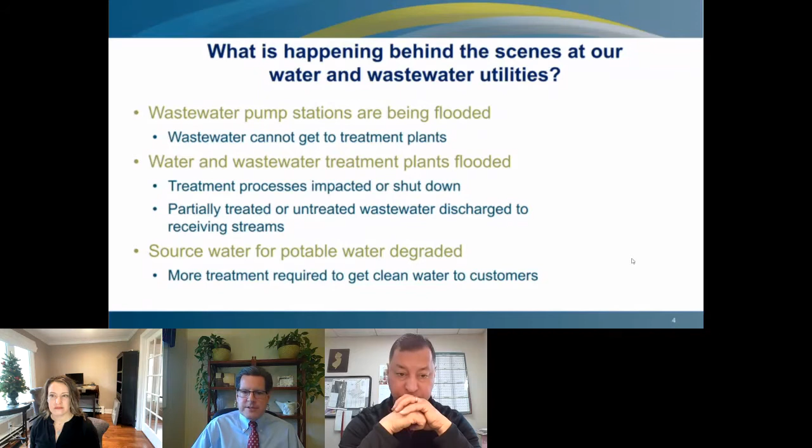So what's happening behind the scenes at our water and wastewater utilities? Well, the first thing we see, and we certainly saw a few weeks ago with the remnants of Hurricane Ida, is that the wastewater pump stations are being flooded. When those pump stations are flooded, we can't get the wastewater to the treatment plants to be treated. Then downstream from those pump stations, we're getting water and wastewater treatment plants flooded themselves. When the flooding occurs at those locations, treatment processes get impacted and sometimes get shut down. We end up with partially treated or completely untreated wastewater discharged to receiving streams. We also have source water issues, because if the wastewater treatment plants are discharging poorly treated wastewater, you end up contaminating the receiving streams, the rivers that we're pulling our drinking water out of. And so the potable water treatment facilities have to treat to a greater level to provide clean water to their customers. Go ahead to the next slide.

Here's a picture, and you can't appreciate this because you don't know what these tanks look like, but the circles you see there - this is the Somerset Raritan Valley Sewerage Authority on September 2nd. There are 10-foot tall tanks there that are totally underwater. Those round rings you see are the tops of the tanks, so there's more than 10 feet of water there. These are the highest flood elevations ever recorded at this facility. This facility's been flooded out in the past, but never to this level, like what they saw with Hurricane Ida. This is a very substantial treatment plant - 23 million gallons a day on average is treated, and during this time it was more like 70 million gallons per day being treated. So their effluent, the treatment plant, was obviously severely impacted.

Effluent quality was reduced. There's a tremendous risk to the operators of these facilities when this happens. I had one guy telling me he was standing in ponded water and suddenly felt an electrical charge going through his entire body, because some of the pump motors were submerged and it was electrifying the water. In this case, there were hundreds of thousands of dollars in damage to the facility.

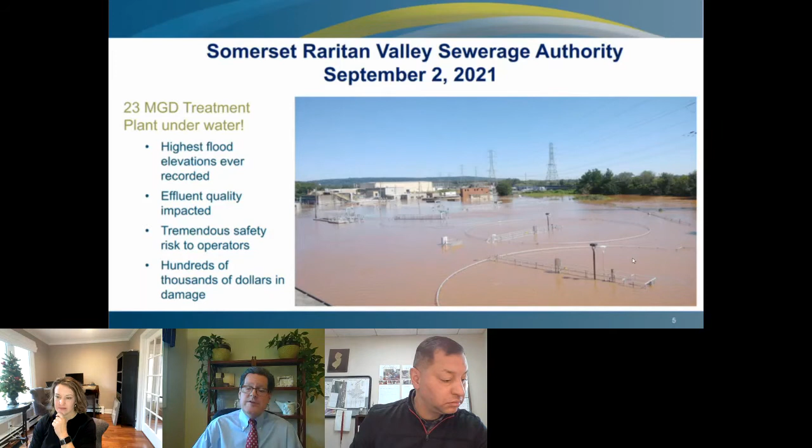If you go to the next slide - this is the Stony Brook Regional Sewerage Authority. I've tried to give you examples of all different size treatment plants. This is their Pennington wastewater treatment plant, only a 500,000 gallons per day treatment plant, but this plant also was flooded to historic levels. In fact, this plant had rarely seen flooding in the past, and it got wiped out by the remnants of Hurricane Ida. You can see here, this is actually when the water level dropped in this picture.

The water was being pumped out. This is a second floor pump station, so there was certainly more than 10 feet of water ponded. Not only did the pump motors get ruined, but you can see there's a chemical feed storage tank laying on its side. They had things like that happen where storage tanks were toppled as a result of the floodwaters. Here again, effluent quality was impacted because so much damage occurred to the treatment plant.

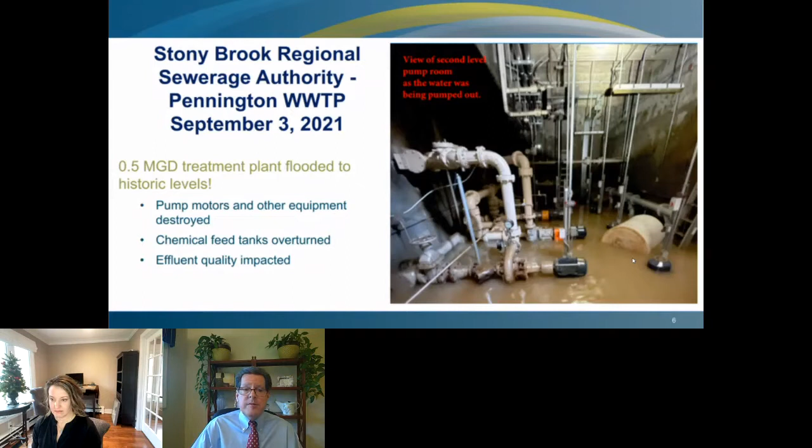We have designed, on behalf of Montgomery Township, a flood wall as a resiliency project to keep this treatment plant from being flooded. But unfortunately, it took 19 months for us to get land use permits out of New Jersey DEP so that we could construct that flood wall. So we could have had this facility protected from this storm, but because the permitting took so long, we haven't been able to build that flood wall.

So something I think we need to think about and discuss today is a way for regulatory agencies and the regulated community to work together better to fast track some of these resiliency projects.

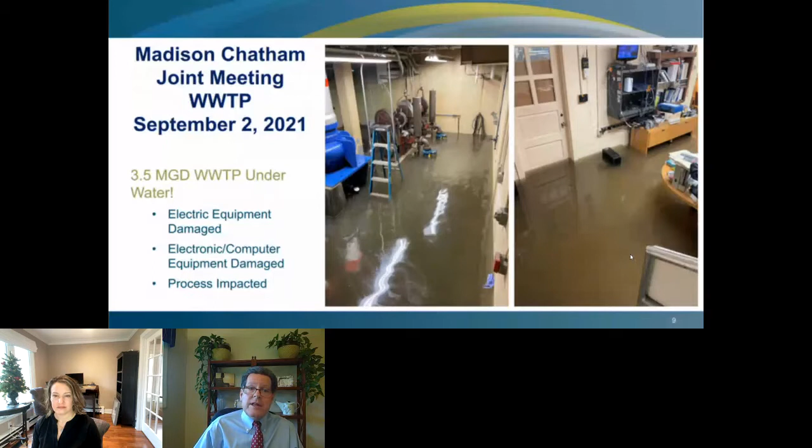Here's the same treatment plant. As I say in the caption here, this isn't snow. This is foam as a result of the treatment process being upset.

Crazy things happen when treatment plants get impacted from flooding. The biology gets impacted, and when that happens, things like this happen. Unfortunately, it sometimes takes weeks to get a biological system back in operation. So anything we can do to avoid this happening in the first place saves an incredible effort down the road.

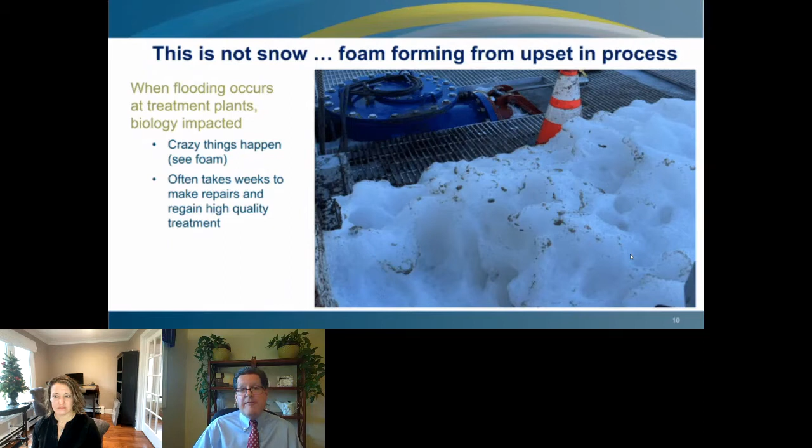So just some thoughts for the future. Given the climate changes that we're experiencing and the substantially increased flooding we're seeing in New Jersey, first of all, we need to update our tools to predict flooding elevations better. What we saw in Hurricane Ida in some cases were flooding elevations greater than the 500-year storm. So we definitely need to predict that well.

We need to incorporate resiliency planning into new designs and our existing facilities. Sometimes after facilities are built, people think that's just the way it has to be. We can incorporate resiliency into our existing facilities.

We need to improve collaboration between the utilities and the regulators like DEP to fast track permits for resiliency projects. A permit for a flood wall should not take as long as a permit to build a 1,000-unit subdivision. They have to be treated differently.

And some resiliency planning is better than none. Sometimes people think it's going to cost millions and millions of dollars to protect from what happened in Hurricane Ida. That's true, but it may be that for 100 times less, you could protect from the 25-year storm, and that's worthwhile. So you need to start somewhere. Look at what low-hanging fruit you have to protect, and that may be for less expense.

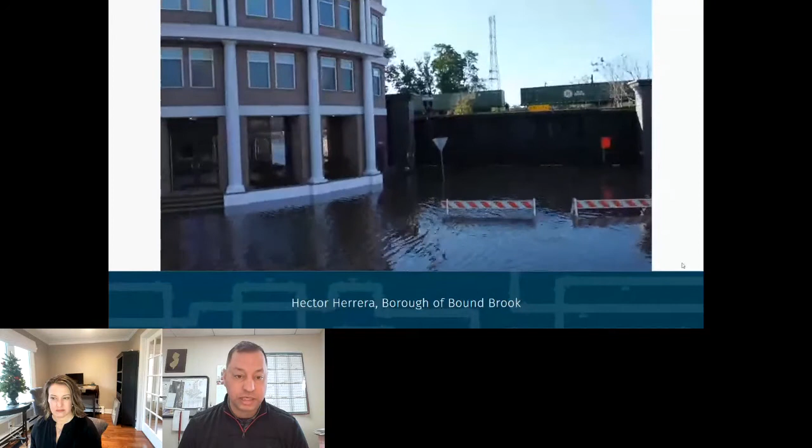Namely the Jersey Transit train getting stuck. And what I really wanted to talk about today was the failure of the Greenbrook pump station, which is owned by the Middlesex County Utilities Authority, a little bit down, not quite a mile down on the Raritan River.

So what you're seeing now is an area that is right at Main Street going into South Main Street. That's the Meridia building, high density. And all of that water that you see there is actually from the backup from that pumping station.

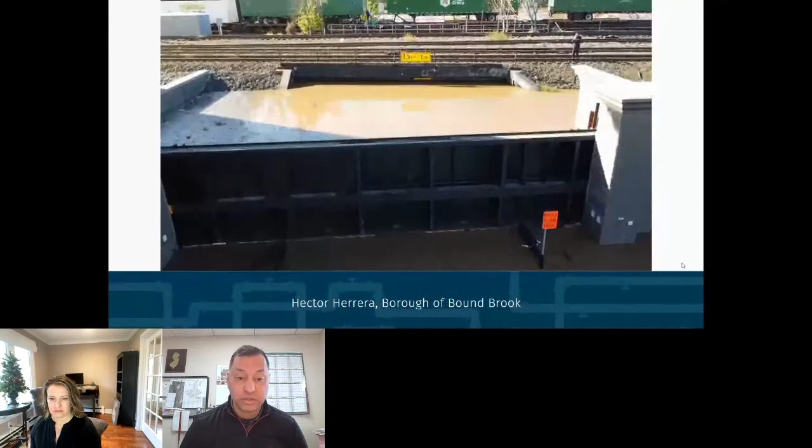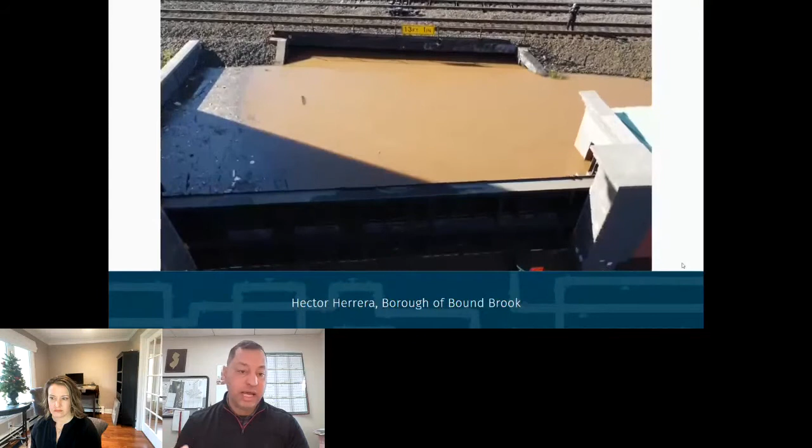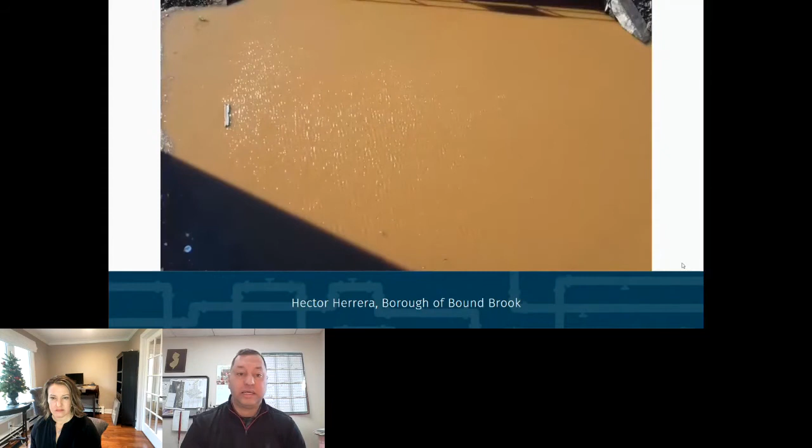That area and that pumping station actually takes on two different systems. One, we'll see in a bit, comes from the borough itself and goes eventually to the Middlesex County Utilities Authority, the MCUA plant. But also very close to here, there is a Plainfield Area Regional Sewerage Authority, PARSA. There's also a 60-inch main that goes through the borough in one of our parks, and I'll show you that in a moment.

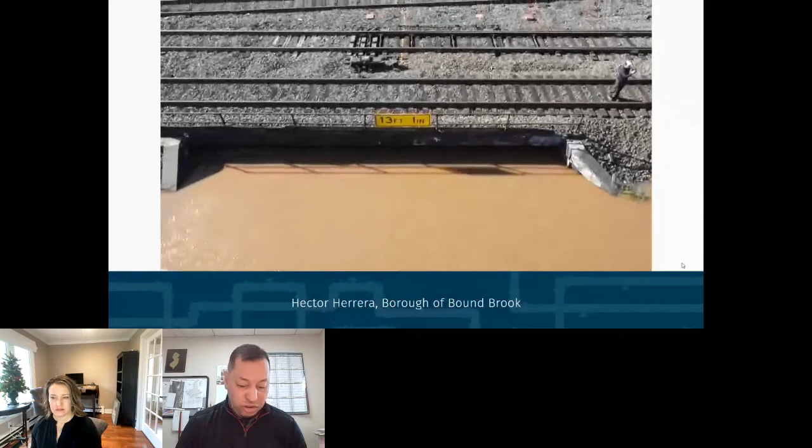So backing up a little, this was going to be the first big major storm since the completion of the flood control project. On our end we're like, this is it, this is the test, this is what millions upon millions of dollars and almost 50 years of planning had come to. It was this moment. And really, we were so focused on that, the communication both ways with the MCUA didn't happen.

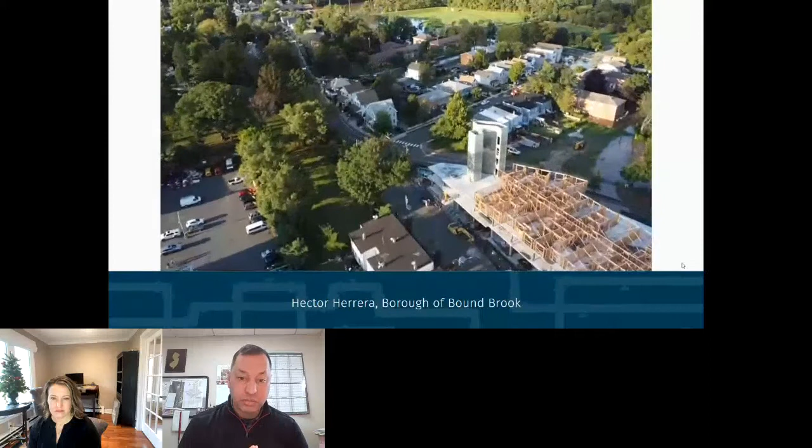So in the middle of that night, right in that area, somewhere a little after 4 in the morning, it starts to back up, and that smell — we all know that smell. This isn't from the river, this isn't the gates failing, this is sewage. We evacuated the area, and what have you.

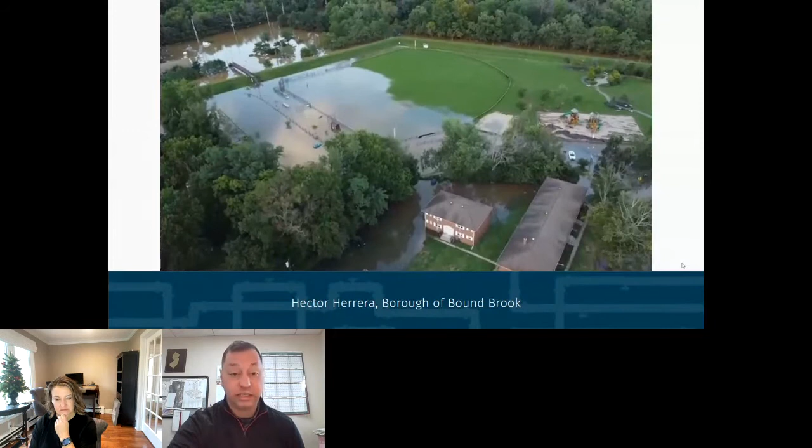The next day, that's the park I'm showing you — you can't quite see because this is after — but after daylight it basically looked like a geyser there. So like, what in the world is going on here? Again, our focus was so much on the gates, we hadn't even really thought about this.

Only to confirm later with the MCUA that yes, they had to abandon that pump station because it was underwater. Again, it's right on the banks of the Raritan, and that was the issue. Eventually PARSA came and cleaned up the park. The MCUA has stated they're going to invest a lot of funds into improving that pump station in hopes of something like this not happening. But really, what I wanted to focus on as the borough administrator here in Bound Brook was the communication aspect of it.

In the days immediately following, we got on the phone with both entities, PARSA and the MCUA, and we agreed there was a need for improved communication. In the days after, they identified and shared with us some of the improvements they would be making, and of course PARSA, every step of the way of cleaning the pump station and the park area, was in contact with us. It's really important for me, and for everyone, to have that open line of communication with our partners.

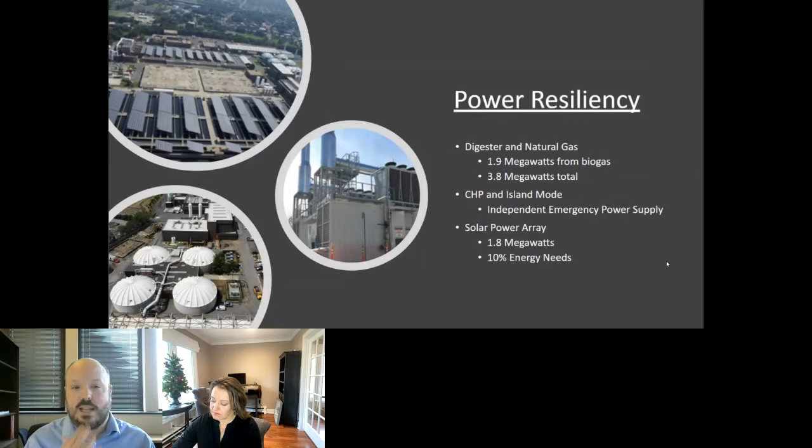I'll only touch on this briefly, but we've also taken steps to increase our wet weather capacity to 185 million gallons per day. Kudos to our operations and maintenance staff who operated a wastewater treatment plant while doing all of these projects, it was really something to see. At the same time we were completing the digester and the combined heat and power system, we were also expanding the capacity by 35 million gallons per day, which means that in times of increased precipitation, we can take more combined sewage from the CSO communities.

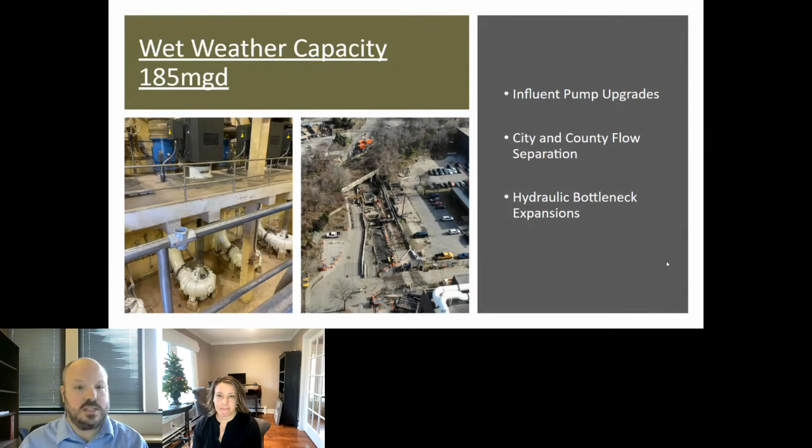Next slide, please. So now I'll talk a little bit about precipitation and flooding. While, as I've just talked about, we've taken strides to take more flow into the plant, we can't convey and treat everything from the Camden combined sewer system, which means we have to really start planning and designing projects in Camden to reduce flooding and overflow.

We have 3 projects in design for Camden City aimed at handling increased precipitation events which caused this flooding, I'm just going to highlight one now: the Pennsauken disconnect. There's a historical, and for the regulators out there, very permitted interconnection between Pennsauken Township and Camden City, which significantly contributes to flooding and overflows in the Cramer Hill neighborhood of Camden. The design is to eliminate the interconnection, separate the area of Pennsauken that is contributing these flows into Camden, get the sanitary flow to the wastewater treatment plant, and the stormwater conveyed to the Delaware River via a stormwater pumping station.

And the climate change piece is this: for today's needs, the stormwater pumping station needs to push out about 60 million gallons per day. However, with models and experts predicting up to a 25% increase in precipitation, the CCMUA is sizing the pump station and the force main to be able to handle up to 120 million gallons per day of stormwater. The idea is to build the infrastructure now for an increased need that we know is coming. So the building will have a larger wet well than is needed for today's conditions, a larger force main, and room to add more pumps and emergency generators. So as the need to push more flow arises, we will not need to go through a major construction project to accommodate it. Next slide, please.

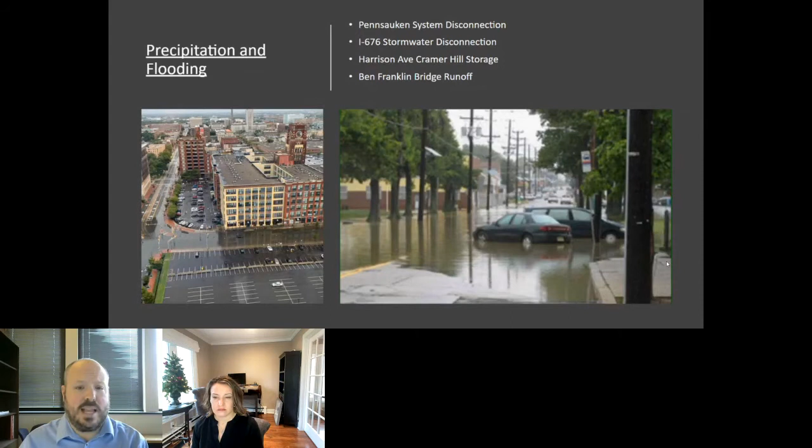I'll run through this briefly, but the last thing that we're doing, really at a planning level, is working with Drexel University and putting together a comprehensive model for Camden City, which will allow the authority to focus on where river rise, predicted to be as much as 35 inches in the Delaware River by mid-century, and increased precipitation and flooding will impact vulnerable populations. By trying to understand the future conditions now with the model, we'll be able to better locate and plan anti-flooding projects in the city during our long-term control plan implementation.

So these are a few ways that the authority is working forward to try to counteract climate change.

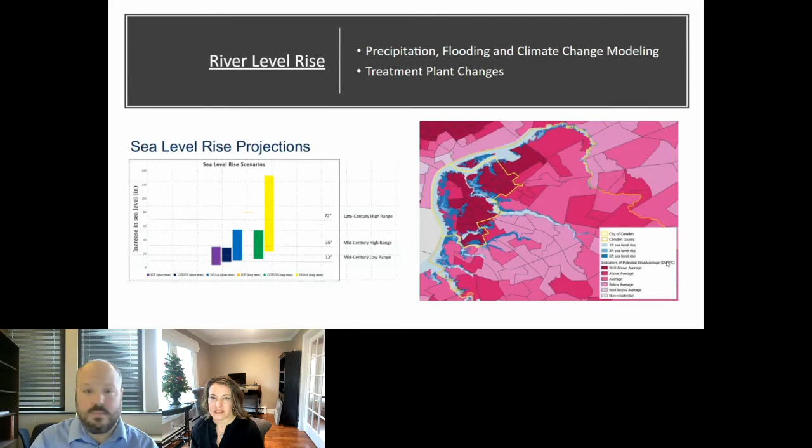Thanks, Jen. Amazing. Great. Thank you so much. It's an array of investments. Now let's go over to Oleg. Could you talk to us about American Water, New Jersey American Water, what they've done to prepare its facilities for impacts of events like Ida?

Sure. The previous presentations have really underscored what happens during a major flood. And unfortunately for American Water, our story actually goes across a 20 year time frame. The first major issue we ever had was Hurricane Floyd. Could you advance the slide, please?

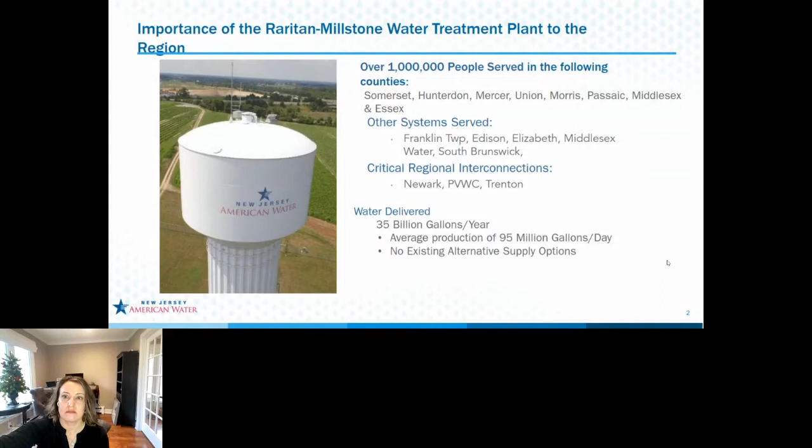So a little bit about the facility we're going to be talking about today. It's the Raritan Millstone Water Treatment Plant. It works in our central operating area and services a population of over 1 million people through either direct customers or other townships served. We also have critical regional interconnections with Newark, Passaic Valley Water Commission, and the City of Trenton. On a regular basis, this facility produces 35 billion gallons of water a year, with an average production capacity of almost 100 million gallons daily. This particular facility, if it goes down, has no other alternative supply options for the system.

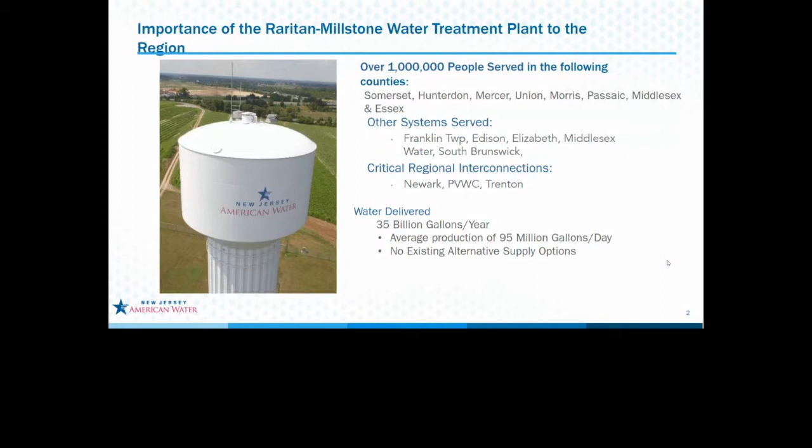Next slide, please. As I alluded to earlier, our first experience with flooding was in 1999 during Hurricane Floyd. I'd been working for the company at that point for a little over 4 years, and this was the first time since 1973 that there was ever a serious impact from a flood. The first impact was Hurricane Doria back in 1973, but it was minor in comparison to what happened during Hurricane Floyd. We had low system pressure because the plant went down.

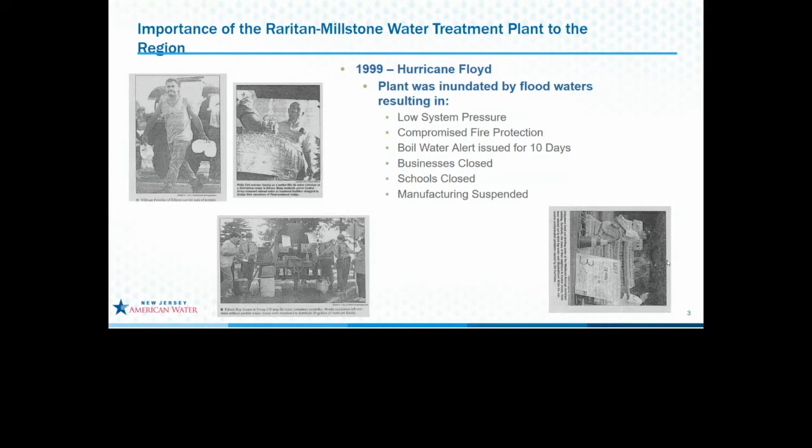It was compromised with respect to fire protection. We were on a boil water alert for 10 days. We closed down businesses. Schools were closed, and manufacturing was suspended for a significant amount of time, impacting the local economy. So next slide, please.

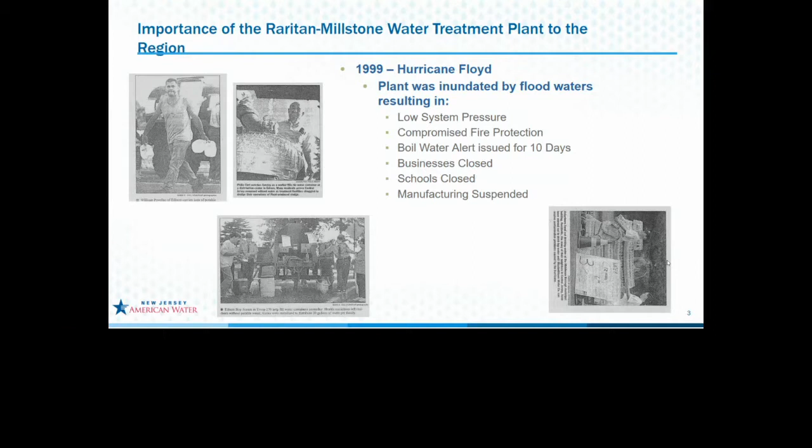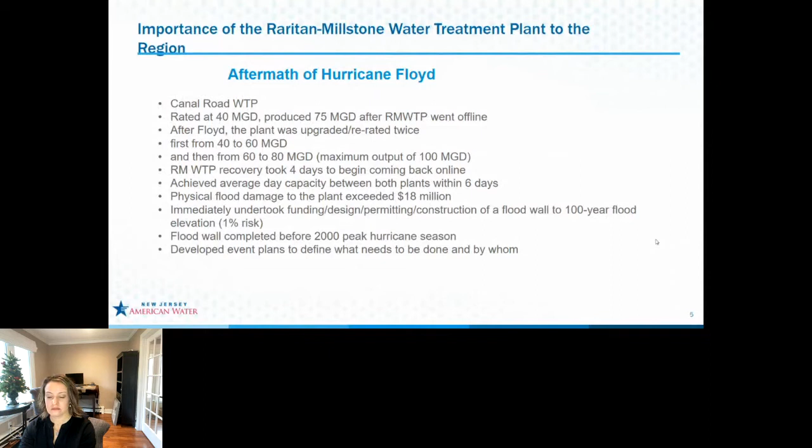So in the aftermath of Hurricane Floyd, when the Raritan Millstone plant went down, there was a sister facility just across the way called the Canal Road Water Treatment Plant, which went online in 1995. It was rated at 40 MGD, but during Hurricane Floyd, when the Raritan Millstone plant went down, it actually produced 75 million gallons of water, really over producing what it was designed to do. Fortunately, it held up very well and produced a high quality effluent, which really saved the day with respect to maintaining system pressure and not having negative impacts with respect to backflows.

So after Floyd, we decided to upgrade and re-rate the plant, and that happened twice. The first step was going from 40 to 60 MGD, then from 60 to 80 MGD, and the facility can now peak at 100 million gallons per day. When the Raritan Millstone plant went down, it took us 4 days to start to come back online, and systematically over the next couple of days, by day 6, we were able to get to average daily production between the Canal Road plant and what we brought back online at the Raritan Millstone plant.

Physical damage that occurred during that particular storm was well over $18 million, and because of the impact to the communities and the financial impact on the plant itself, the company immediately undertook the funding, design, permitting, and construction of a flood wall to the 100-year flood elevation. This was done within a year. That flood wall was in service in time for the peak 2000 hurricane season. So it moved quickly, and New Jersey DEP helped move that along quickly, but only to a 100-year flood elevation event.

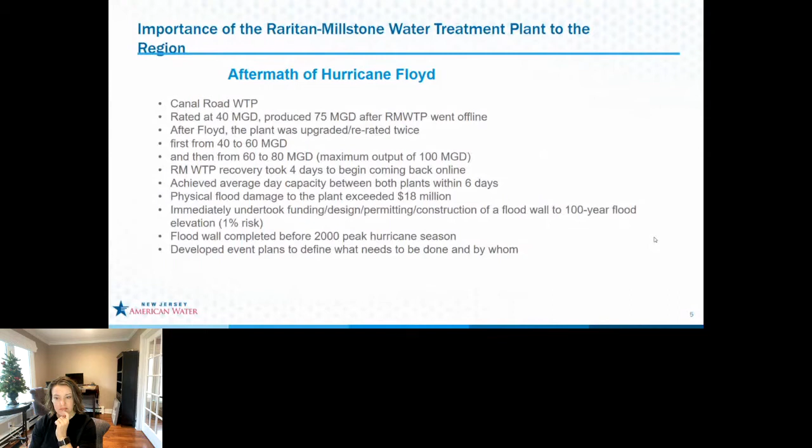So the next big test we had was Hurricane Irene back in 2011. With the new flood wall in place, the facility survived very well. It was the second highest peak compared to Hurricane Floyd at the time, and the facility survived very well. Next slide, please.

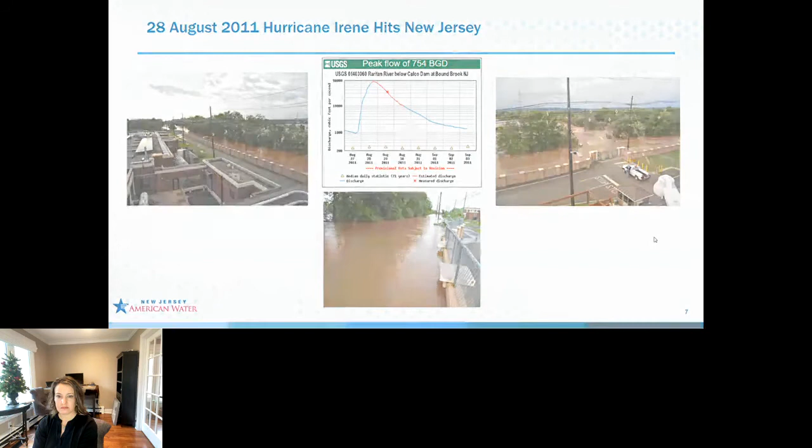But just barely. I call this shot the money shot. This is a picture of the flood wall, or the flood elevation, in comparison to the top of the flood wall. And as you can see, we were an inch away from disaster. I call this the money shot because when I presented this to company leadership, we again undertook immediate planning for expansion or raising of this wall. Next slide, please.

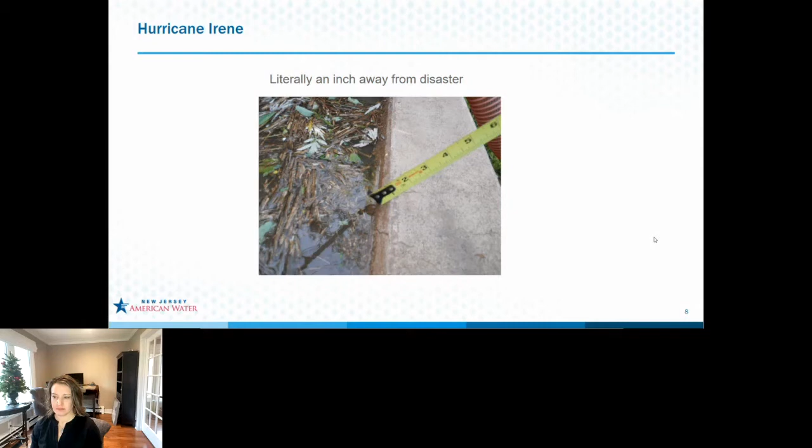As I said, the wall that we constructed after Floyd withstood Hurricane Irene, but just barely. So the company immediately undertook funding, design, permitting, and construction to raise the flood wall elevation. We did a cost-benefit analysis to come up with an elevation that was reasonable and cost-effective, and what we came up with was the 500-year flood elevation.

The flood wall was raised to elevation 48. Previous elevation was elevation 44, so we went up 4 feet. This construction was completed in time for the 2018 peak hurricane season. The final cost of the project was $32.4 million.

Concurrently with this project, we also undertook an emergency power upgrade, which cost about $17 million and was put into service in mid-2020.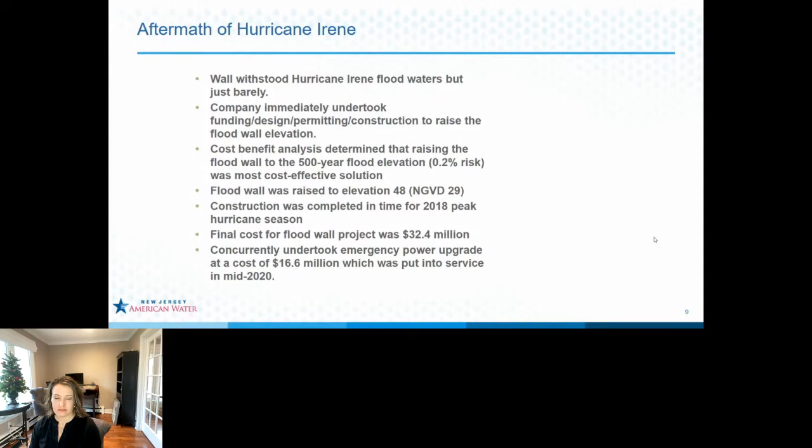This leads us to the video that I'm going to show you. This is drone video at the peak of Hurricane Ida, and you'll see just how successful this particular project was. You can start at any time.

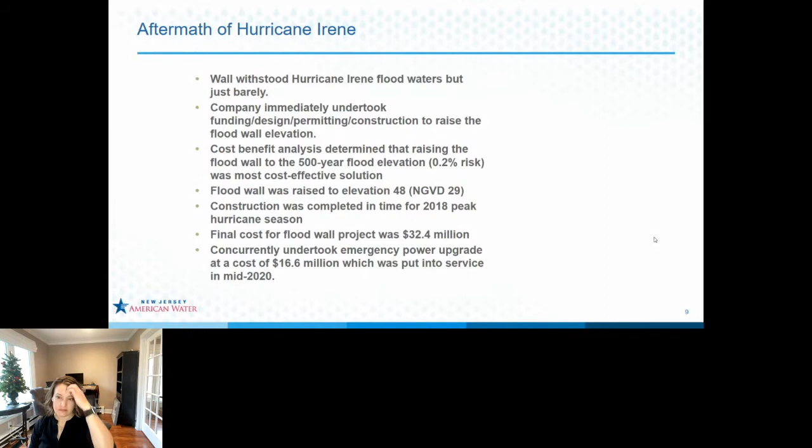So this is the front of the plant, and you can see the flood walls surrounding the facility. On the inboard side of the flood wall, it's high and dry, no issues whatsoever. The plant continued to operate and everything was fine. At the bottom of the screen, you'll see what look like 3 trailers. Those are 3 2.5 megawatt generators, part of what I described previously, giving us backup power capability that would be uninterruptible.

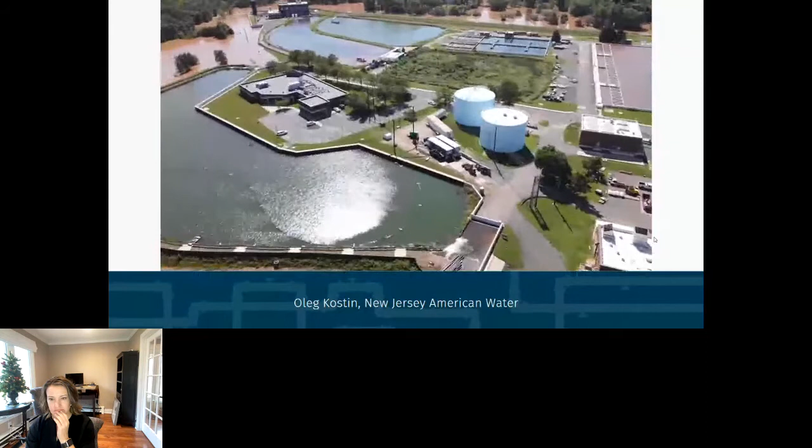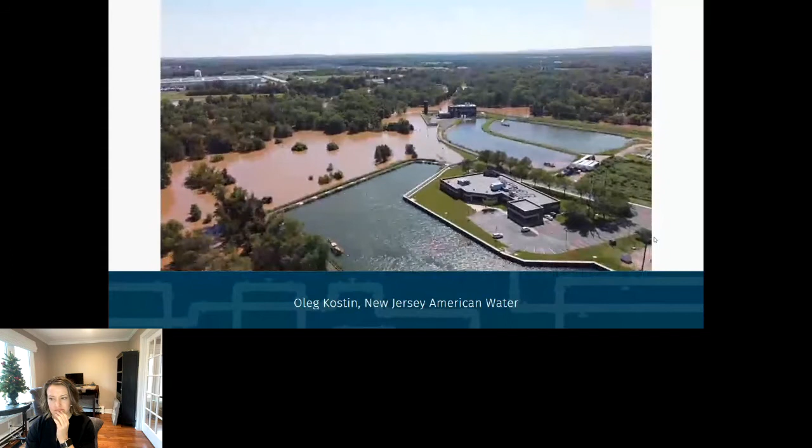Obviously, you can see the floodwaters surrounding the outboard side of the flood walls. Everything on the inside of the plant is nice and dry and green. The water, after it's been treated, is pristine.

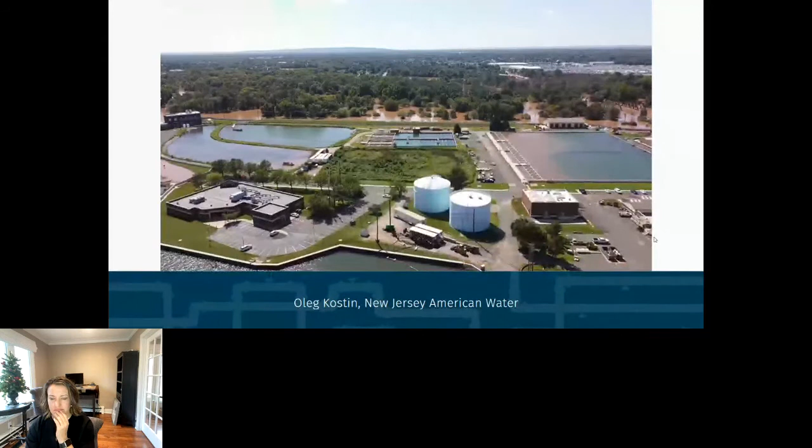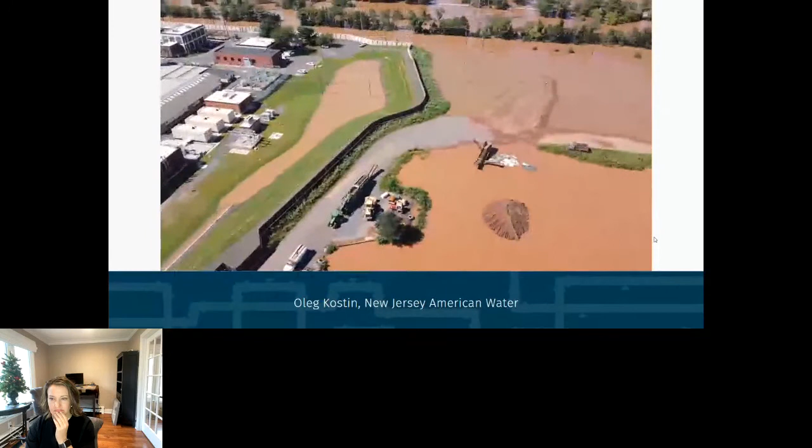It's interesting — Hector and Jim Cosgrove referred to their incidents. This facility is actually just upstream of Bound Brook, upstream of Hector's town. We're going to, as it tilts up, look at Bound Brook right here. So you can see how devastating it was.

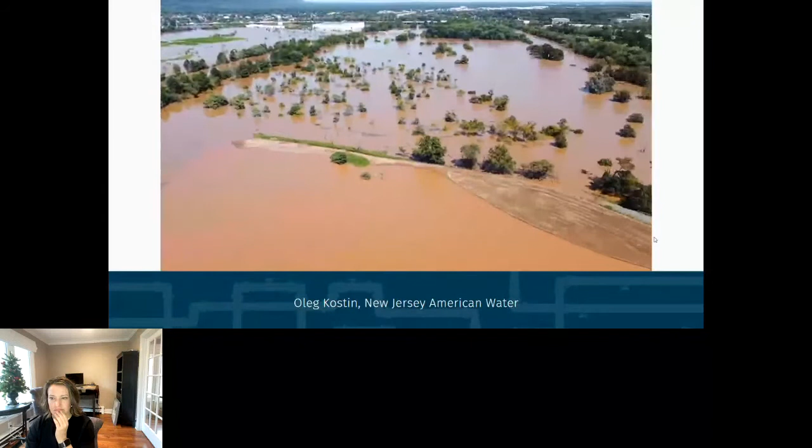Had that flood wall not been there, there would have been well in excess of $32 million worth of damage, not to mention the disruption to the local economy and to the populace. And that's all I have in my presentation.

Unbelievable. Thank you so much, Oleg.

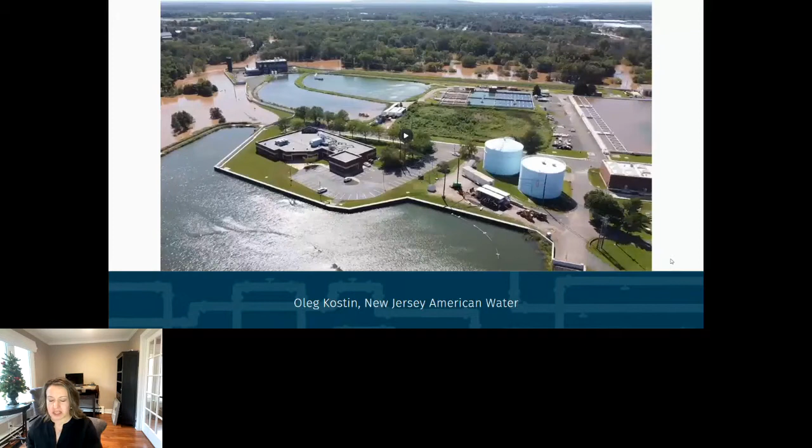An important point from Oleg as well as from Scott: we're not designing, when we're thinking about resiliency, to a specific storm. We're not saying we're going to protect from a future Ida or Floyd. There are going to be additional storms in the future. We know that water levels and rainfall levels are going to rise, and we also have to protect against coastal surges. So now we're going to move over to Atlantic County.

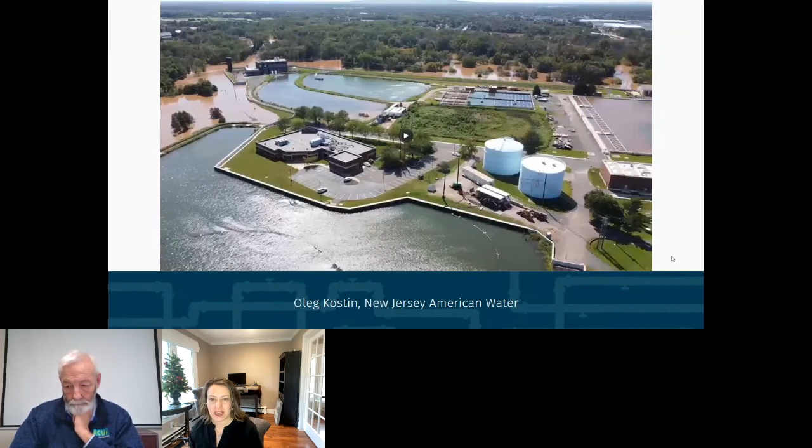Rick, the question for you is, what is your authority doing to prepare for climate change impacts?

We have a different problem than the previous speakers because we're located on the coast, immediately in the Back Bay. I remember fretting about Floyd, but luckily for us it went up the Delaware Valley or the interior of New Jersey and not along the coast. But every storm season is a bit scary, and the impacts of the severe weather we've had in the last 10 or 15 years is significant.

I'm going to deviate before I get into my presentation for a second. We had a very strange wind event called a derecho about 6 years ago here in southern New Jersey, and it didn't affect other parts of the state, but it caused the power to be out in this part of the state for a week, which of course impacts pump stations, sewage pump stations. I think we've all learned about the vulnerability of pump stations, and it's not something that everybody focuses on.

But anyway, let me start. Next slide, please.

So there's the Atlantic County Utilities Authority wastewater plant in normal conditions. It's an island right behind Atlantic City, immediately adjacent to the Forsythe National Wildlife Refuge. It's the site of the previous Atlantic City sewer plant, and this regional system came online in 1978 and has been operational since.

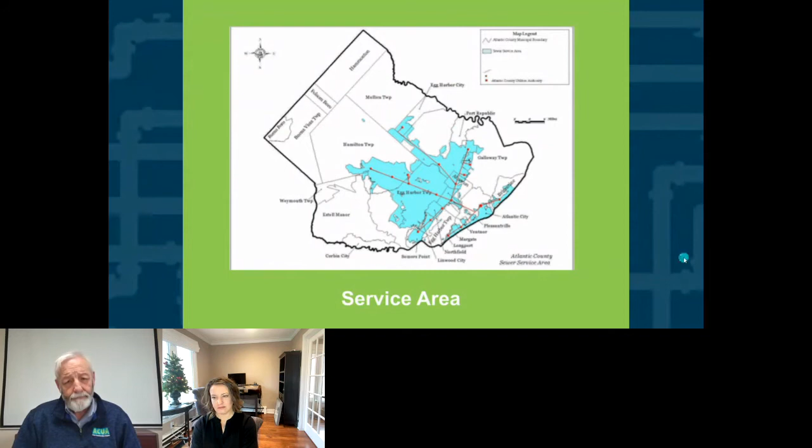Here's a money shot, similar to what Scott or Oleg was talking about. This is not Hurricane Sandy. This is a storm, not even named. In 1991 we called it the Halloween storm, a nor'easter. You can see how close the plant treatment processes in the aeration basins and treatment facilities were nearly compromised. This was, I'd say, our first wake-up call, and it's made us really focused on the increased flooding happening on the Back Bays.

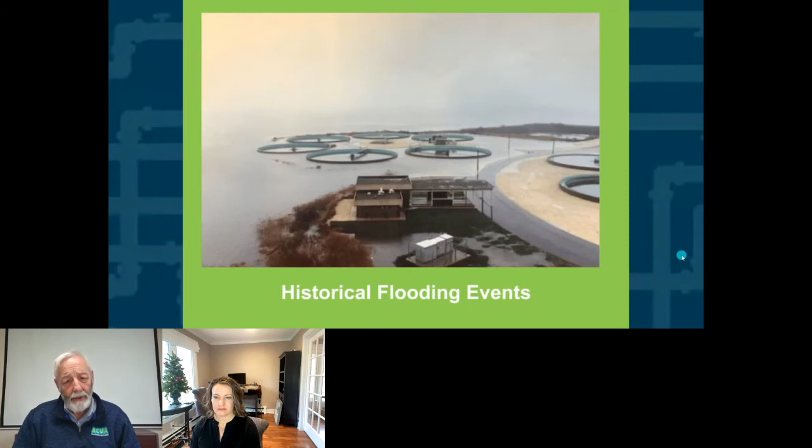Next slide. That's another shot from that storm. Next slide.

After Hurricane Sandy, where we literally came within a couple inches, similar to Oleg's recent experience, of the treatment process being compromised, we have a plant that's 30 million gallons a day normal treatment. It goes up in extreme weather, storm and flooding events to 80 million gallons a day, mainly from infiltration through cracks in the municipal systems. That happens a couple times a year, depending on the storm.

We decided that the real answer for our plant was the seawall project, similar to what was just described by American Water at their water treatment plant. We applied through the Environmental Infrastructure Trust for funding, $3.7 million. Similar to what Jim mentioned, it was a long permitting process of at least two years. Luckily, during those two years we did not face any extreme flooding events, but it's been done for about two years now. Top of the wall is 11 feet above sea level. We're pretty sure that gives us significant protection for most of what can be anticipated in the coming years.

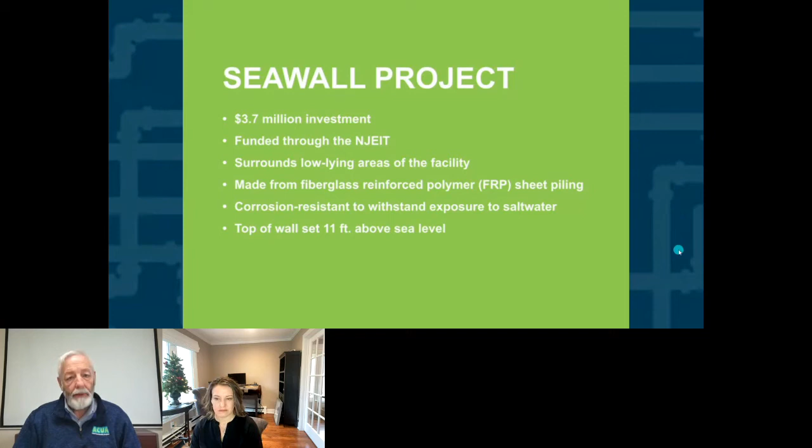Next slide. The yellow shows the outline of the seawall that has surrounded the entire plant site. Where you don't see the yellow line and the seawall was not built, those parts of the island are high enough to achieve protection of 11 feet. At the road, we have a special barrier that would be installed to protect that opening during a storm event.

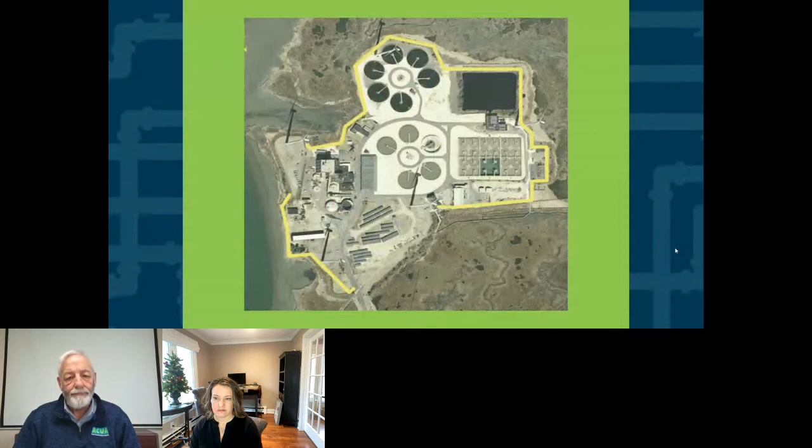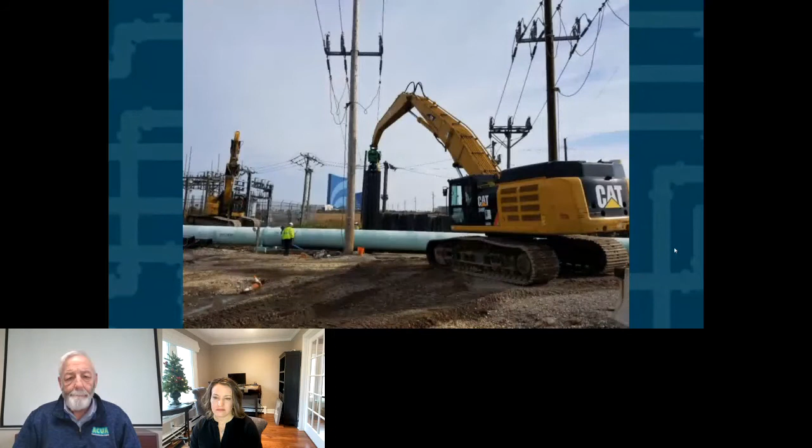Next slide. This is a shot of the construction of the seawall project. Another shot—it's a bit challenging to install this. And of course, the permitting process, as I mentioned, was pretty extensive and took a while.

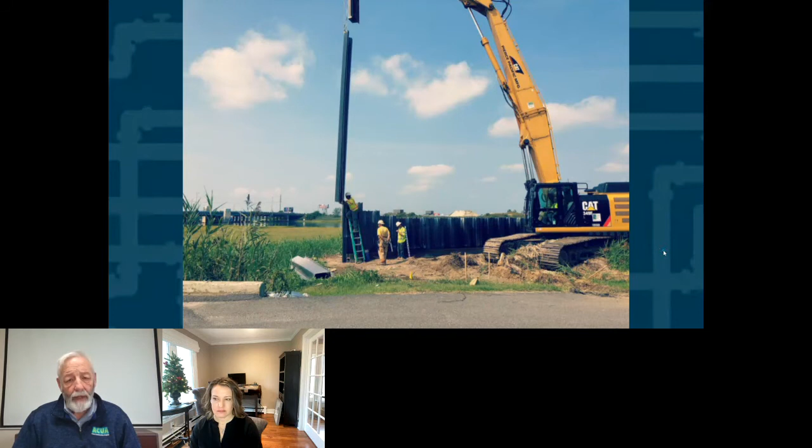There's the seawall, not totally installed with caps yet, but it's adjacent to the major connection to the local power grid, Atlantic City Electric—that's their property and/or their responsibility. You can see how vulnerable the power system is to flooding.

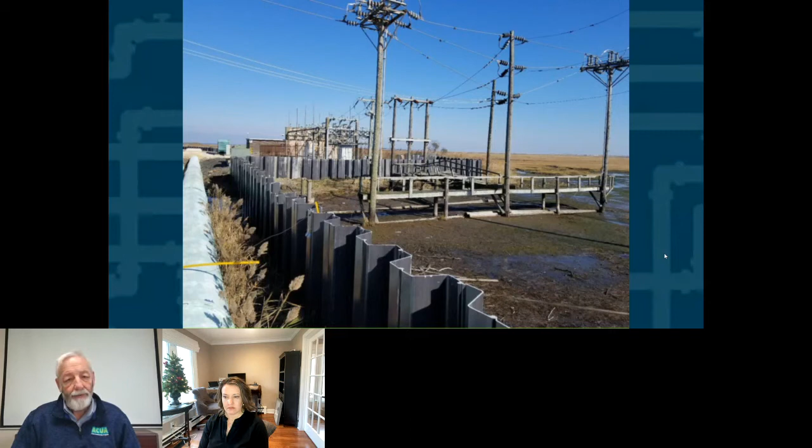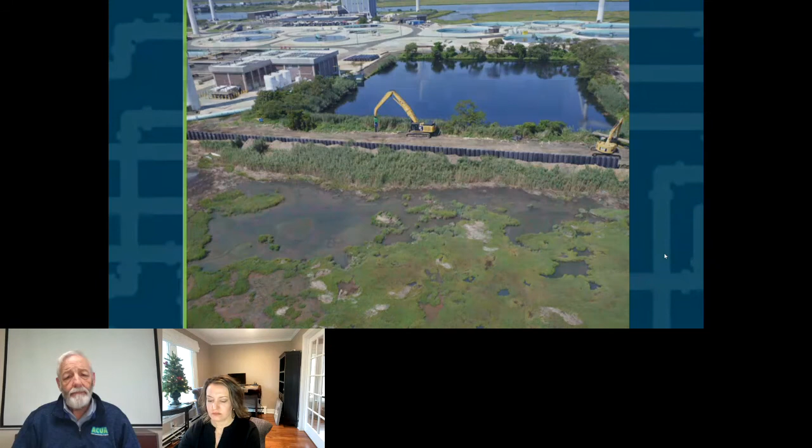Another shot, that's the equalization basin, where the treated effluent is stored before it's pumped. The effluent is treated and pumped to the ocean for discharge. Next shot—another shot of the seawall in the plant.

Pump stations, as described by Jim and Scott, are really critical, and most people don't even know what those buildings are. Most of our pump stations that we operate, over 20 of them throughout the county, are located in low-lying areas immediately adjacent to streams or the bay. They're subject to flooding almost on a regular basis during extreme weather events, flooding, storms, ocean nor'easters, and so forth. We couldn't really justify building a seawall around each one of those.

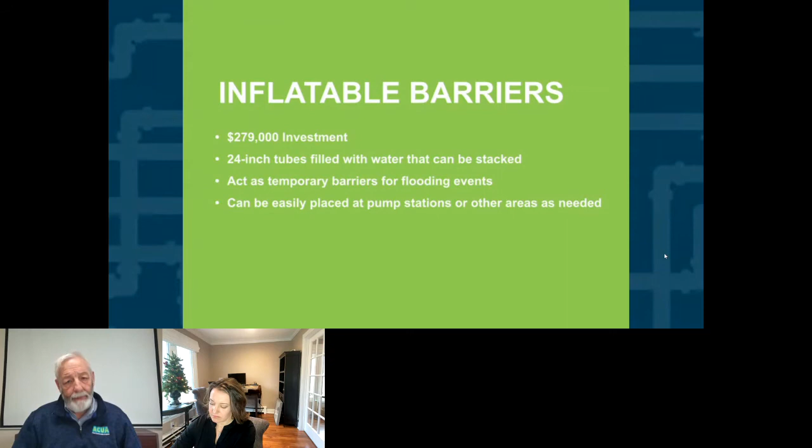What we have instead is a series of inflatable barriers, purchased through the trust, that we can deploy when we know a major event is coming to our most vulnerable stations. We know by experience where those are. Next shot, please—and those are the portable barriers. We have practiced deploying them.

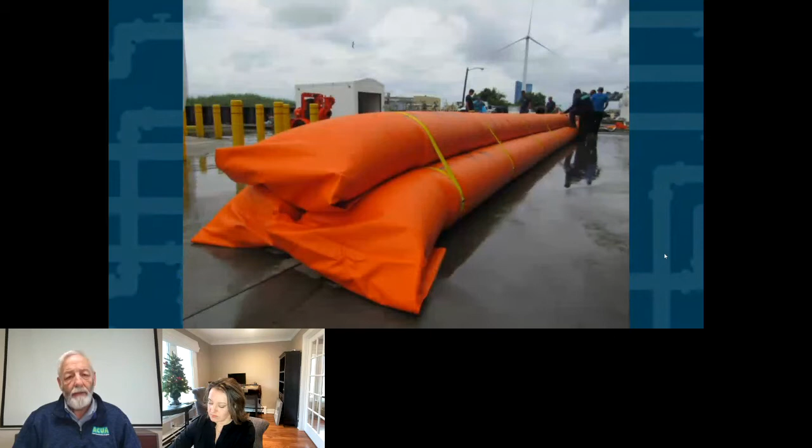We have not had an event where we had to deploy them yet, so once a year they get exercised and our staff gets trained and prepared to install them. Next shot—this is one of those training events, done at the wastewater plant, not actually at a pump station.

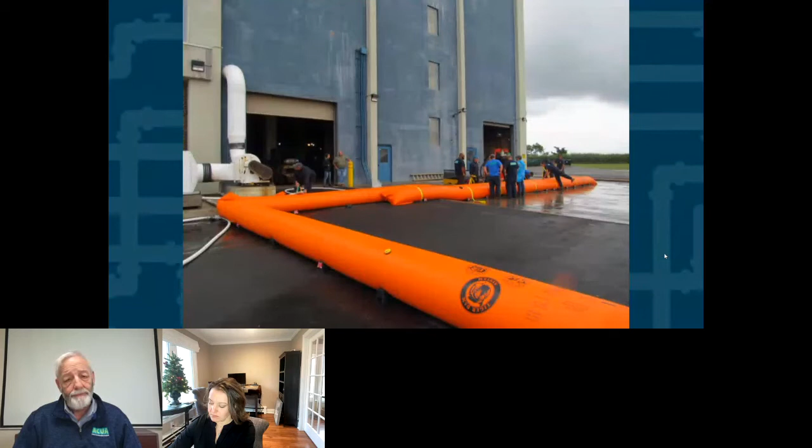The other point that's been made is how important our power resiliency is. Through the New Jersey Environmental Trust, we upgraded our backup power at the wastewater plant severely. That was our major impact during Hurricane Sandy—the power company could not provide us with power. Ironically, we have a wind farm on our plant that provides 60% of our power, but during a weather event like that, they must disconnect from operations to protect the grid.

We also have a solar project that provides another 4% of our power, but we're not able to island that renewable energy, so we were totally relying on backup power. At the time, we had 40-year-old diesel generators, which we've totally replaced with new diesel generators. We continue to explore the ability to be an island power source of our own, utilizing the renewable energy on site.

It's a fairly difficult process through the BPU and other processes, but we're hopeful that in the next few years we'll be able to do that.

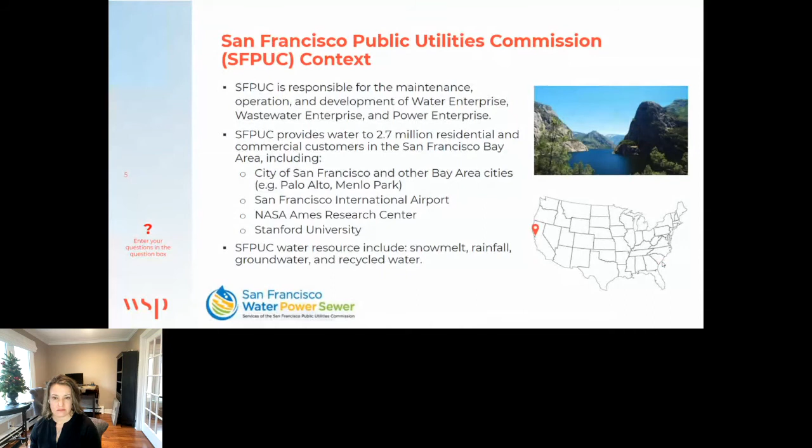We're already seeing some of the climate-related impacts under the RCP 8.5 emission scenario, as developed by the Intergovernmental Panel on Climate Change. What would your future risks look like, and how would your business function — whether business services, watershed management, or capital project planning — be exposed to these risks under these conditions, and what would this risk look like in 2070?

Although it's of course hard for participants to imagine a timeline that far into the future, it still helps them think outside the box and consider implementing something right now that would be worth investing in a few years from now, knowing that many of these risks could happen at a much larger scale, and current conditions could be exacerbated even more.

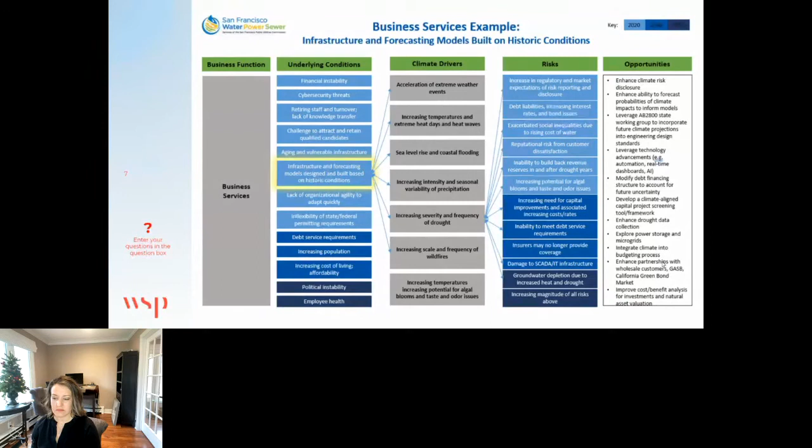What are some of the risks that could stem from this dynamic? Again, related either to reputational risk or just the ability to provide reliable access to water, given that the population in the Bay Area is increasing along with companies becoming commercial customers, damage to water infrastructure, to IT infrastructure, some new agreements with insurance, etc. The list of opportunities was co-developed together with participants, and the SFPUC received a whole range of different options for solutions in this business function.

Identify next short-term or mid-term steps.